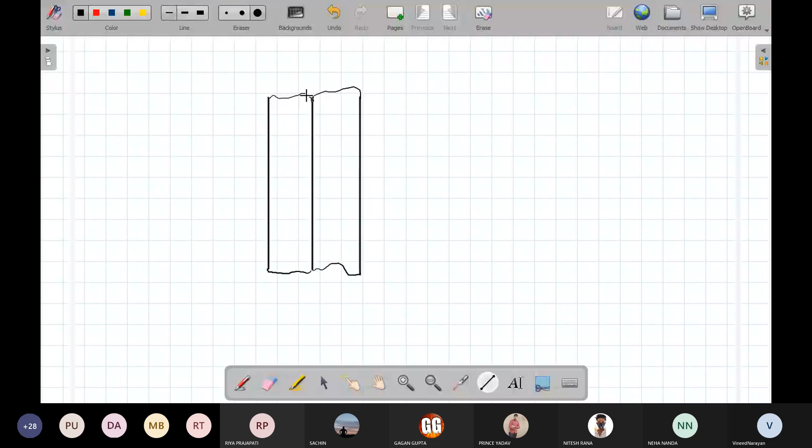So you can do hatching because the question asked to draw full section. I think it will be wiser to draw the nut bolt first and then do the hatching. So you can take this dimension from this and start drawing nut bolt.

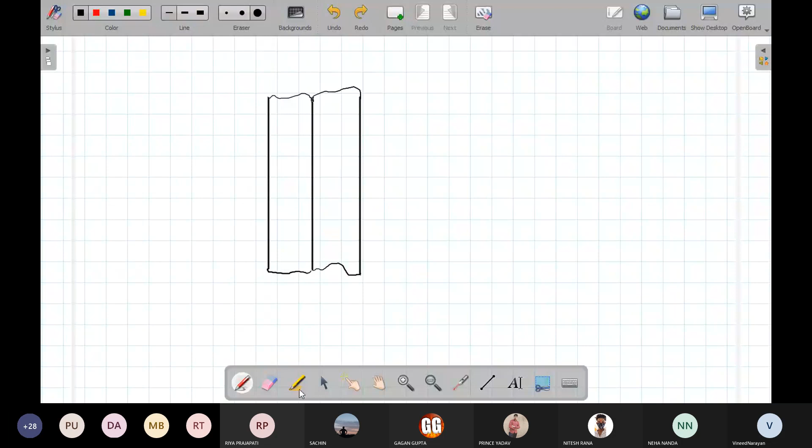So this is the middle part of the bolt which is passing through the plates in this way.

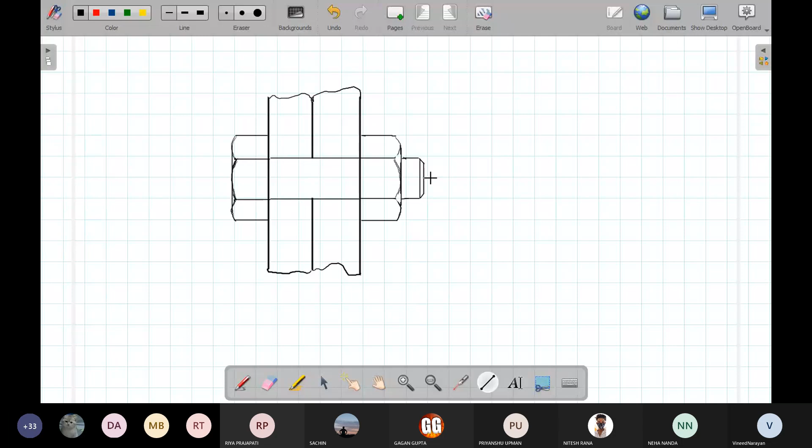If you want, you can show the thread also in this way. Okay, so you can hatch now this cut portion.

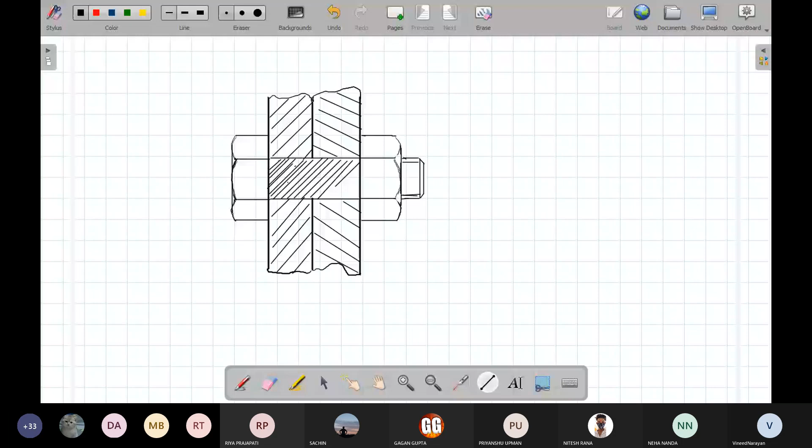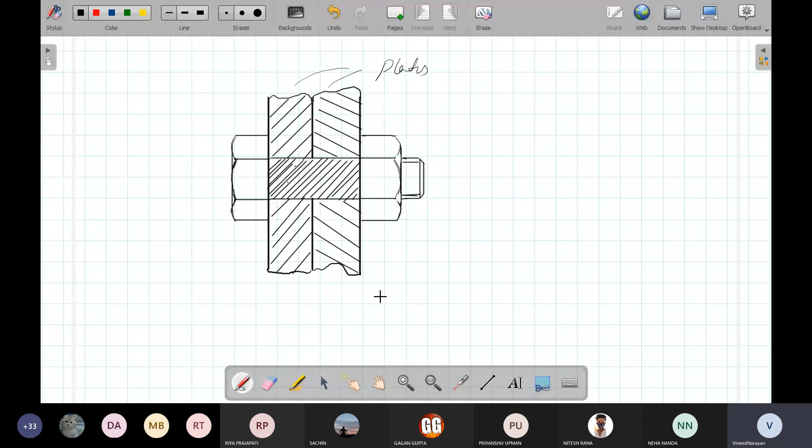Now you can differentiate all these three materials. These two are plates. Okay, and now you have to draw top view and side view.

Or if it is a full in section, then I guess this also should have been in. Okay, anyway, I will draw it later.

Same diameter. From top view, it will appear slightly different, somewhat like this.

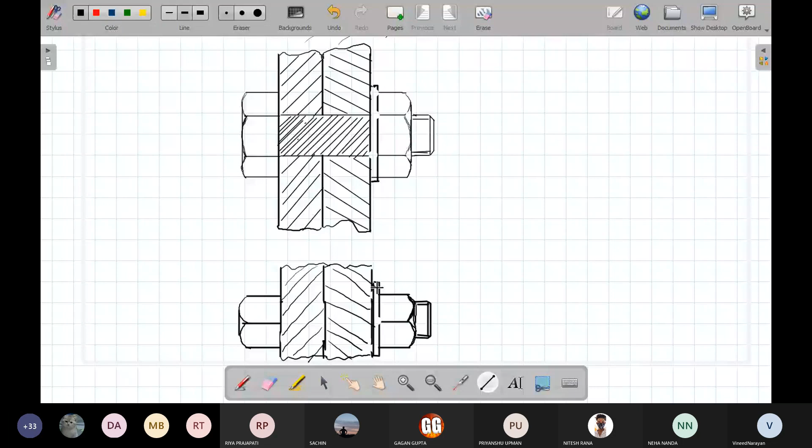Okay, now you have to show the plane of section. That one we can show by phantom line or center line. I will show with the phantom line.

Maybe you can give the name AA. So this kind of plane of section is not shown by most of you in the previous drawing.

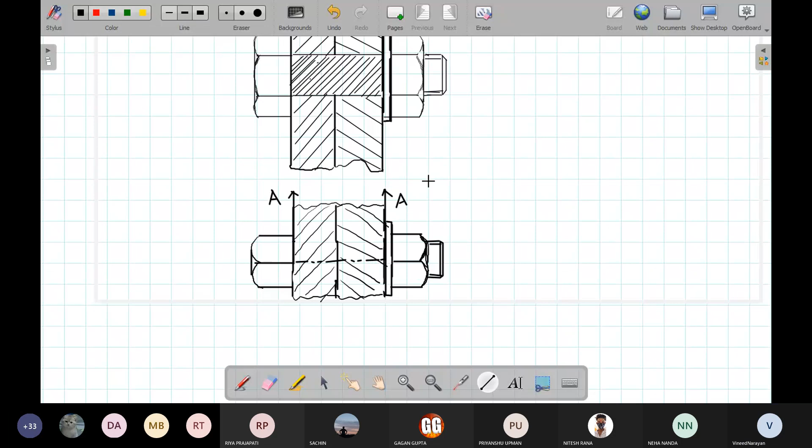And we can complete this by drawing this side view. This plate is of infinite or more than the size of drawing sheet, let's say.

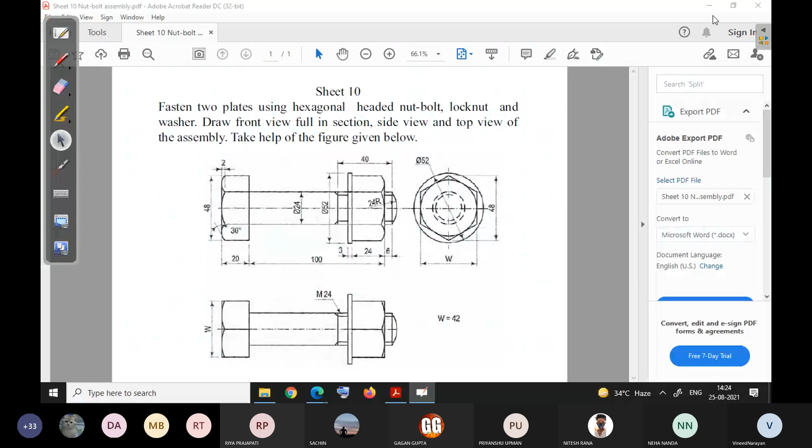Now you have to draw this part of the nut bolt exactly like this. I will draw approximately.

These are hidden lines of the shaft, and this is also hidden washer.

And these two concentric circles are to represent this thread portion of the bolt. Okay, one more circle is there.

Normally, if you observe bolt head, it will be somewhat like this.

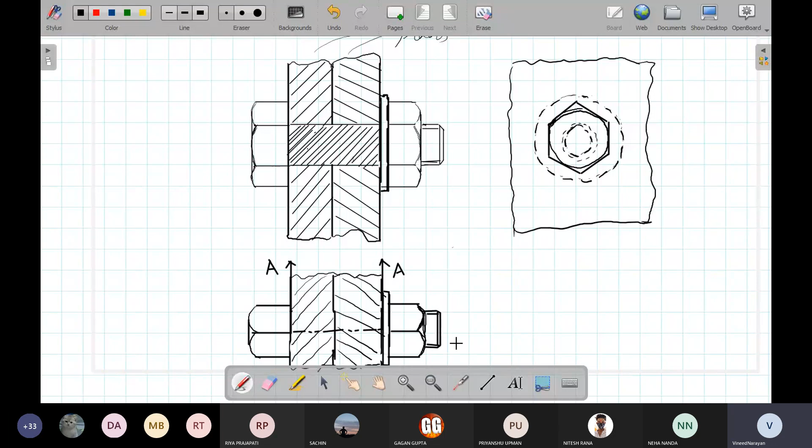Now, this is one way. If you want to show full section or even cut the bolt also, that is also possible.

In that case, instead of this, you can show AA. You have to cut this portion also. That becomes a little complex. Let me do it.

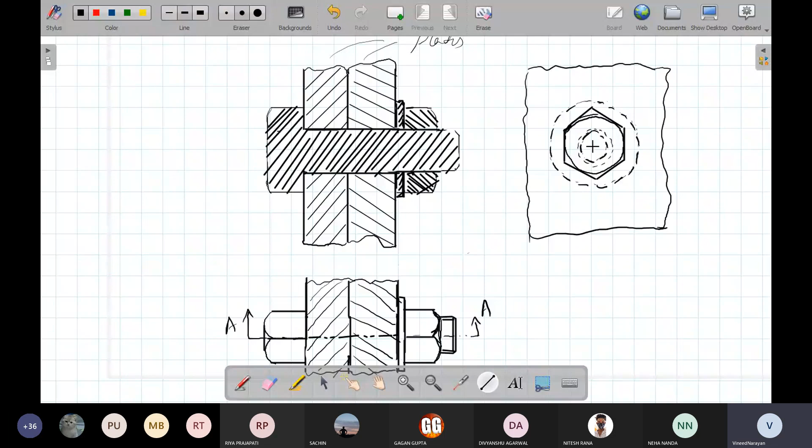Yes sir, and sir, this hexagon, can we draw it only by the protractor, or do we have to use a compass? See, you can draw even with a scale, but now it's a proper hexagon, a regular hexagon, right? If you draw a hexagon in this fashion, definitely I will understand that you have not used any instrument. Suppose if you are drawing like a regular hexagon, even if you have not taken proper measurements, it will be fine, correct?

So you can draw it accordingly, saving time. You need to consider, firstly, to finish the drawing in time. Secondly, draw or attempt maximum number of questions. And anyway, I am not going to measure whether each side is equal or not. At first look, if I find the drawing is not proper, then I will deduct marks. Like in this case, it's not a regular hexagon, right? If you join the vertices, then some angles are not 60 degrees.

I think for ease, you can use a compass and draw a circle, then take the radius and cut each portion. This will take much less time. Take some radius r and then cut that r around the circle, then join these points. This will be much easier, I guess.

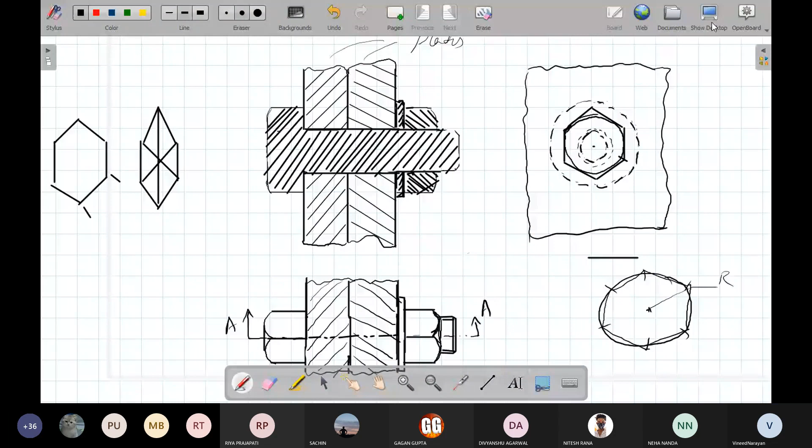But the helping line should be thin. Only the edges of the component should be in dark. Helping lines are always thin. Like here you can see the dimension lines are very thin, and there is no ambiguity about which is the component and which is the helping line.